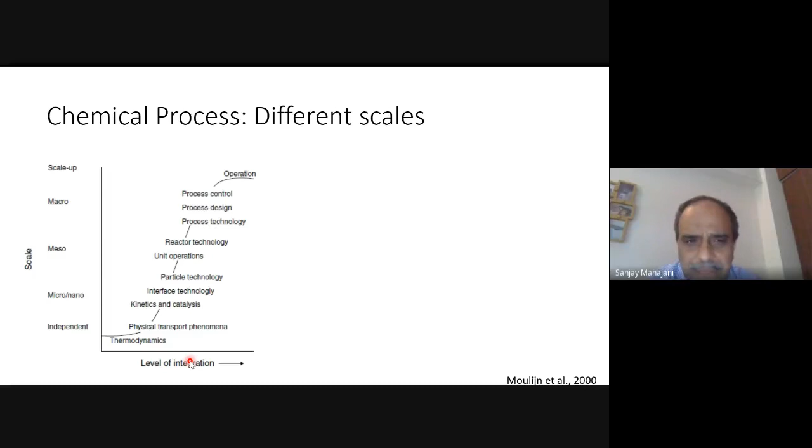So it is scale dependent, and at the same time the integration level goes up. When I say level of integration, what does it mean exactly? The complexity, okay. In simple terms, it is complexity, or probably combination of various steps together. So okay, this is catalysis and kinetics.

Then I'm not going to talk about every subject, but then you can very well understand that we have interface technology, particle technology, unit operations, like distillation, evaporation, crystallization, absorption, stripping, wherein you have even more level of integration, and the scale dependency is happening.

What is the implication of scale dependency? That means suppose I do an experiment in laboratory, and I want to actually take it to a larger scale, say 10 times, 100 times, or 1,000 times. Will it get replicated very well? The scale-up issues, you may face some problems, and that's why you have a scale dependency more in the case of unit operations.

You have to consider mass transfer, how it behaves in different geometry or different scale of operation, what kind of Reynolds number you will get, what kind of Schmidt number you will get, how will be the heat transfer, what is the mode of heat transfer that you need to have. So all these, like unit operations, and even the reactor technology, that means what kind of reactor you will use, whether it will be a multi-tubular reactor, a single fixed bed reactor, or there'll be interstage cooling, heating.

So all these factors need to be considered so that it becomes more and more complex, and of course definitely scale dependent. Now we are going to go to process level. So this was still at the equipment level, this was at particle level or reaction level. Now we are going to the process level. The integration now increases further, and now the scale also increases. Now it is becoming a macro scale, MACRO.

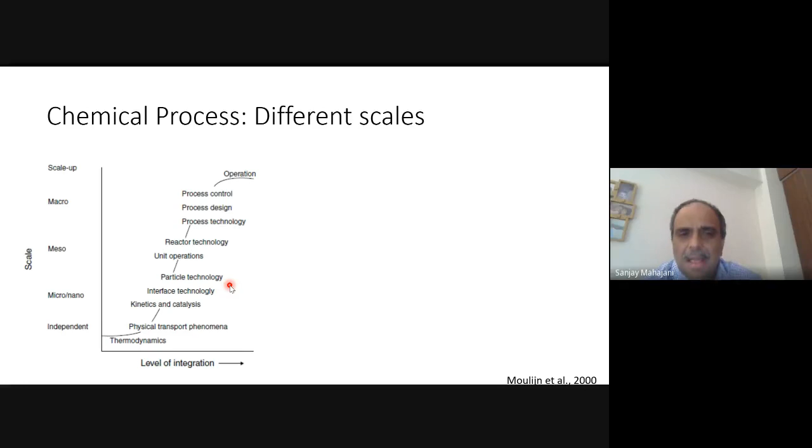Then at a reactor level you have a meso scale where you are talking about particles, reactors, reactor selection, and all that. And then you have a process when the reactor becomes part of the process, where you have many other blocks connecting to each other in the form of a network, which is nothing but process in our language. So that is nothing but a macro level.

So in terms of scale, there are broadly three scales, but I will further fragment them in terms of modeling and simulation. Computational techniques as such, learning it as an independent subject, is more towards mathematics and numerical analysis. But if you look at the context of chemical or biochemical engineering, it's better for engineers to first look at applications and then learn kinetics and computational techniques, because otherwise it is only mathematics, then there's no fun. Mathematicians would love to do it, but engineers will always look at applications, and then only they will be driven towards doing some maths.

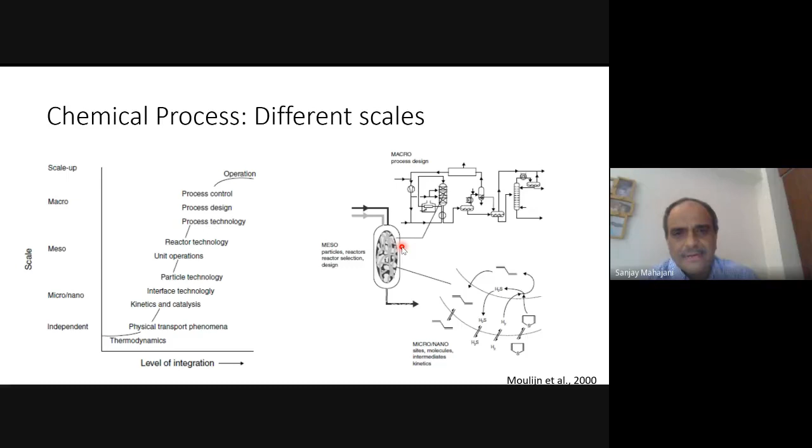So I think by this point it is clear. Let me go back to the chat window and see if there are any questions. No questions so far, that means all of you are with me.

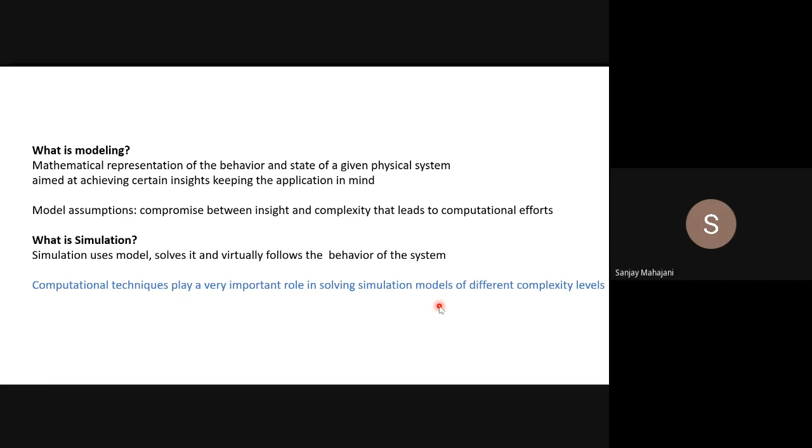It all depends. Scientists who want to understand what's happening on the molecular level will predict the movement of molecules, how bonds are stretched, how bonds vibrate. There the purpose is different - not for commercial use or taking action in an actual plant, but for understanding the science behind it. So you can compromise on speed of calculations and wait for a sufficiently long time to get results. I hope it's clear. I'll move to the next slide.

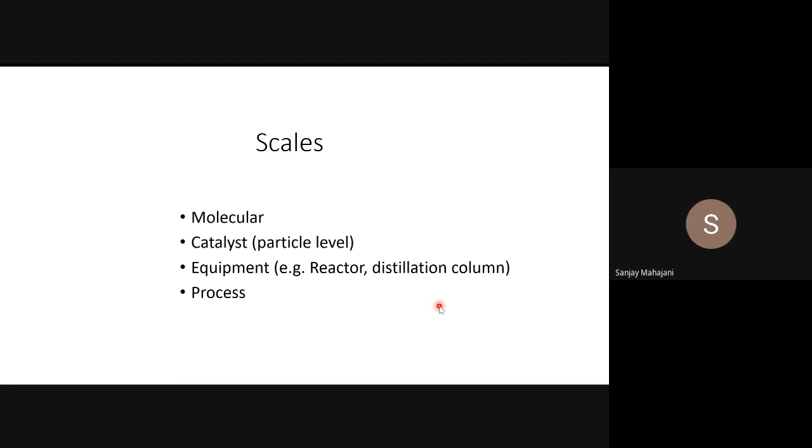Now again, as far as scales are concerned in chemical engineering, we have molecular scale, catalyst or particle level, equipment level, and process level. Imagine a reactor - reaction happening at molecular scale, there can be things changing. At catalyst level we need to predict something, at equipment level we predict something like reactor, distillation column, extractor, pump, compressor. At process level we need to do something, and the scale varies - molecule is of nanometer dimension, then you have processes occupying space of 1 or 2 kilometer radius, like a refinery.

Coming back to reactor design - I'm focusing more on reactor because, as I told you before, that's my research interest. But otherwise also, reactor is the heart of any chemical process, and every chemical engineer is associated with reactor. I think that's a general case study we can always take when we talk about subjects like computational techniques.

So I'm saying reactor design and simulation. I told you I'm going to ask you a question here - what is the difference between design and simulation? Can somebody unmute himself or herself and give this answer?

A design problem and a simulation problem. Sir, design is a specific plan we are preparing for a particular problem. Simulation is working on that particular design, optimizing a problem.

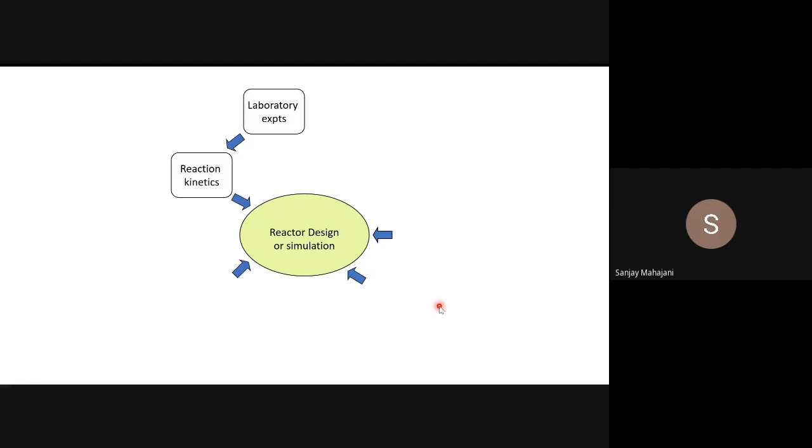So can I determine reaction kinetics by modeling? Can I determine reaction kinetics by first principles, through theory, understanding the reaction mechanism, understanding the reactivity of molecules, understanding what is the activation energy for a reaction, without doing experiments? This is something that is really catching attention these days, mainly because quantum mechanics and density functional theory were there before, and people had made advances in theory much earlier. But what is happening today is we have computational facilities that are quite efficient, high speed computers able to do calculations simultaneously on different chemical computational platforms, and because of this our ability to solve models has gone up.

We always think reaction kinetics means go to the laboratory, do experiments, generate data, and come up with some rate law based on that—what is the order of the reaction, what is the rate constant, what is the activation energy, and so on. But without doing experiments, can I get the same or similar or more complicated expression and explain something? It is possible, but today, as far as theory and overall modeling efforts are concerned, it is a gray area. I won't say people have not done anything, but there is enough scope to actually work on this. For it to come into mainstream will take some time, but there are a lot of things happening.

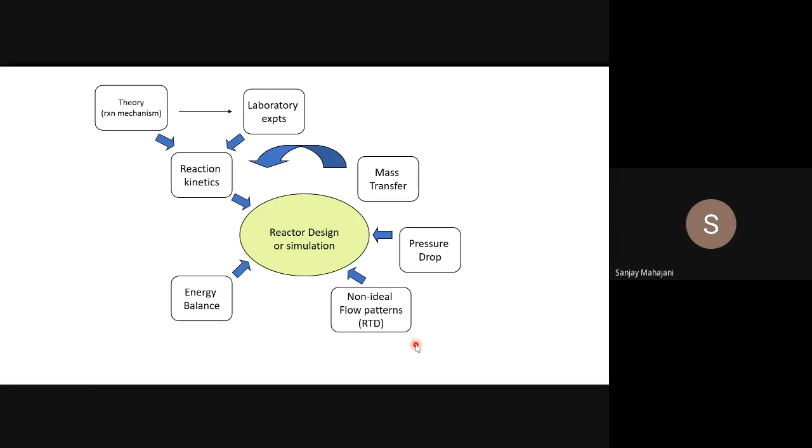Then about pressure drop: most of the times for gas phase, pressure drop also affects reaction performance. If you have a higher pressure drop, the density goes down, the concentration gets affected, the driving force of the reaction gets affected, and the momentum balance has to be written to actually get this right. So you have mass balance, energy balance, and momentum balance to be written together, and you have to have a model for that.

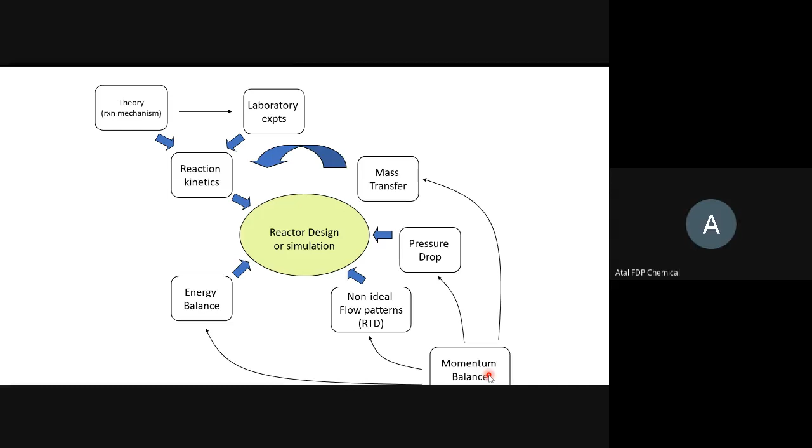Is somebody asking a question? Hello? Let me go back, or let me ask the coordinator if there are questions in the chat box, then I will stop the presentation. Is that fine? Yes, sir, at present there are no questions in the chat box. No, sir. Okay, fine, there is no question. If there is any question, just tell me so I will stop. Okay sir, we will inform you. And if any participant has a question in between, you can always unmute and ask. Okay, not a problem. Non-ideal flow patterns—any question on non-ideal flow patterns?

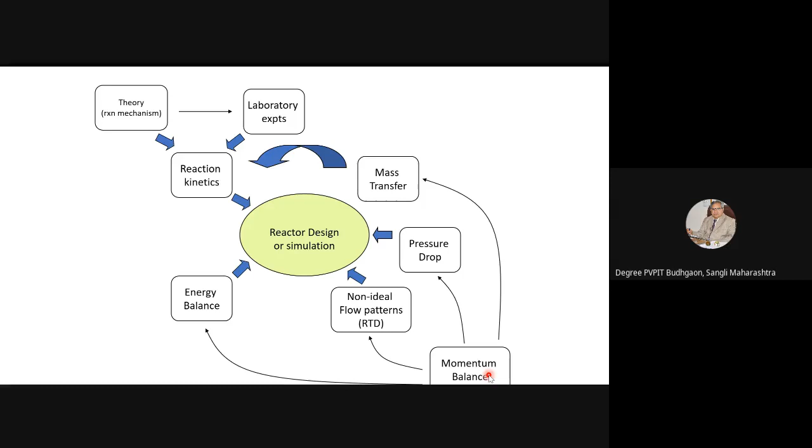How does non-ideal flow pattern and pressure drop contribute to momentum? Oh, okay, actually it's the other way around. The momentum balance would contribute to pressure drop and non-ideal flow patterns.

So I need to write the Navier-Stokes equation in three dimensions to understand the velocity vectors and see whether you have axial mixing, mixing in the radial direction, and so on. Similarly, pressure drop is also included in the Navier-Stokes equation.

I need to write momentum balance to get all this, along with mass transfer and energy balance. The coefficients are a function of Reynolds number, and boundary layer thickness also depends on it. So momentum balance is very crucial, and in fact it is more difficult compared to mass and energy balance because it has three directions of velocity, x, y, z, which makes it more complex.

We tend to make assumptions of a one-dimensional or at most two-dimensional model. We don't go to three-dimensional models in undergraduate curriculum because it becomes too complex to solve, and students won't appreciate it unless they get answers. They first learn something relatively simple, and that's why textbooks normally don't consider momentum balance in reaction engineering courses. So it is decoupled from reaction engineering, but it is very, very important, as I said.

Is that clear? Does the temperature difference contribute to this momentum balance?

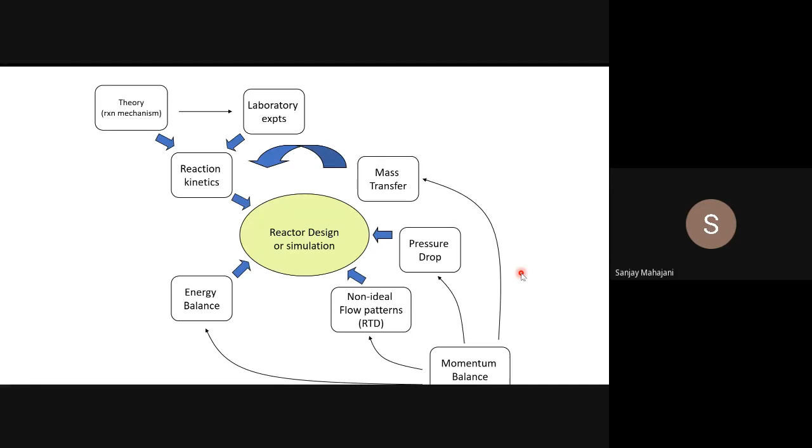So that's where modeling, simulation, design, different computational techniques and algorithms will all feature. Shall I go ahead? Yes, yes, sir.

So this is the complete picture as far as the reactor is concerned. This slide, I don't need to tell you much, it's very basic, like reaction kinetics and so on, but I included this slide just to maintain continuity with what I'm going to tell you later and what I've told you before. So what is this?

I am not going to read this, this is all basic reaction engineering. You can see the Arrhenius plot there, the rate expression there, everything there. You can see activation energy, how it changes with progress of reaction, and this is nothing but activation energy.

Why did I make this slide? Because the next slide is going to tell you how to calculate activation energy. Now, by the way, how do we determine activation energy for a given reaction? Most of the time we determine it by conducting the reaction at different temperatures and plotting the Arrhenius plot, and the slope gives me activation energy, right?

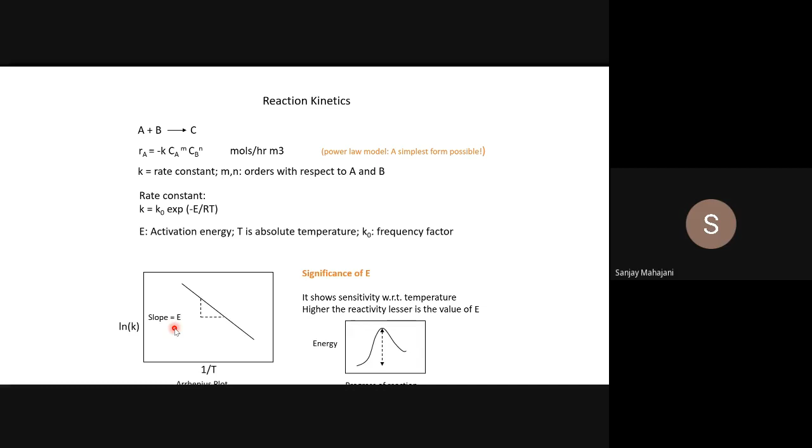So what it means is I need to do experiments. But if I don't want to do experiments, and at the same time want to understand better how to choose a catalyst, which catalyst will work better, I need to do modeling. I need to do modeling at the molecular level, to understand what happens on the catalyst surface.

I need to understand how molecules walk on the catalyst surface, how molecules fight with each other on the catalyst surface, how molecules love each other on the catalyst surface. So in order to know all this, we need to write equations at the molecular level.

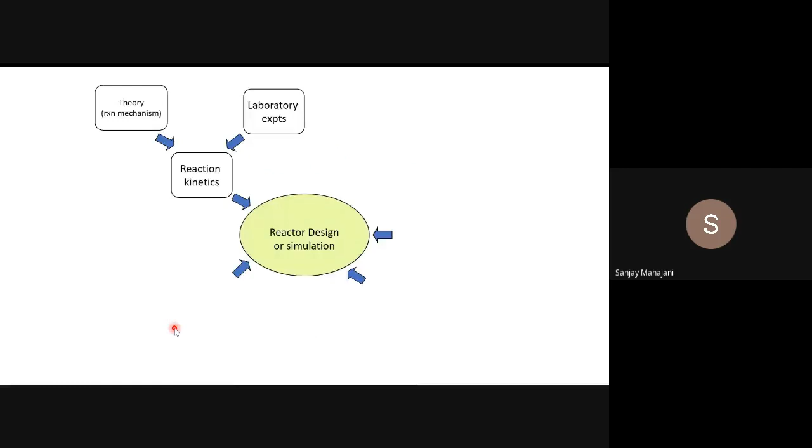Look at this slide again. I'm talking about time and scale. If you go back to my earlier slide, this is the slide. I am somewhere here, talking about small size and small time, at this level.

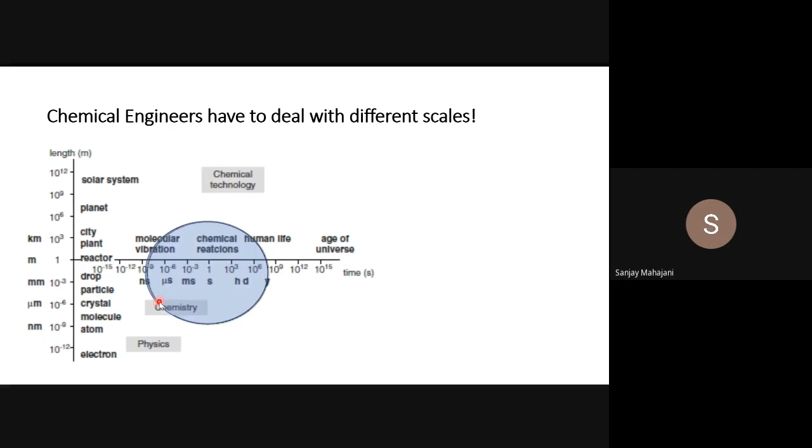So time and scale. Coming back to this slide, there are many efforts that are going on. And what we are conversant with as normal chemical engineers is this, where we are talking about continuum.

That means I don't look at molecules, how they behave, how they move, and all that. I don't see that. Whenever I write a model for a reaction or reactor, I just write it as a continuum space. That means everywhere - suppose if you have a CSTR, at every point you have a molecule present, both the molecules are present, A, B, and of course C. So I really don't distinguish between molecules. That is our continuum model.

But then if I want to understand the intrinsic kinetics better, if I want to calculate the activation energy and so on without doing experiments, I need to go to smaller and smaller scales. This is again a field on its own - it will take another 10 lectures to actually explain what I've given here. This is one figure that puts together almost everything.

So then again you have different scales there, within your molecular level itself, and you can go back and do some calculations depending on what you want, what is your objective. The smallest one talks about femtoseconds and all, where it actually tries to capture the vibrations in the bonds, translational motion, vibrational motion of molecules, then lateral movement and all.

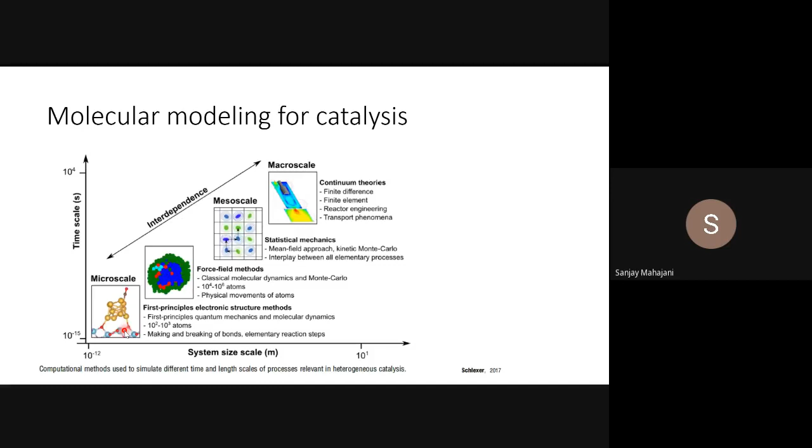But why are we able to do it in such a simple manner? It doesn't look like a complicated set of equations, algebraic or non-linear algebraic or linear algebraic, or differential ODE, PDE and all that. Why? Because we have simplified them. Try to understand the role of assumptions here.

But remember, there again we make assumptions that the reaction is first order and all that. If the reaction becomes second order, or the reaction has two reactants, then defining effectiveness factor becomes difficult. So you have to write equations and actually solve them together. The model becomes more and more complicated. Gas-liquid mass transfer—if you don't have solid, but gas dissolving in liquid—there again you need to write film theory or some penetration theory and come up with equations to solve for rate of reaction. Why are we doing all this? Because we want to get this particular rate in our equations—the exact value, the realistic value of this rate. It may not be intrinsic kinetics; sometimes it may be hampered by mass and heat transfer effects as well.

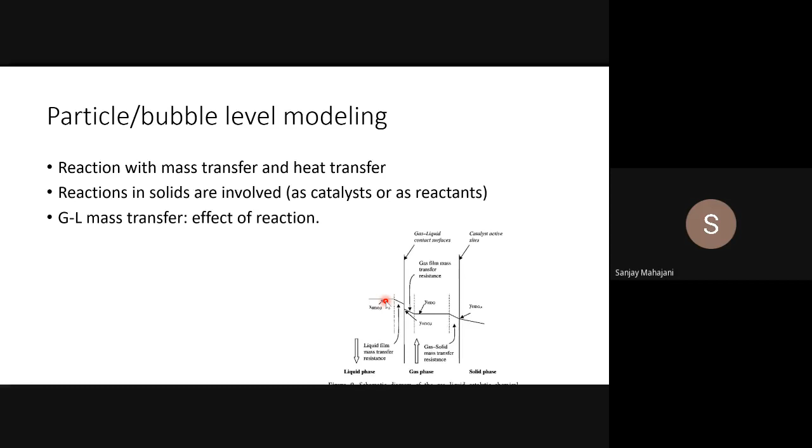Let's move to the next one, where we are talking about mixing related issues. Remember that slide where we talked about mixing and non-ideal flow patterns? They are very important, but they are something that we normally tend to ignore. When some students come to our reaction engineering course—like last year I asked an MTech student—do you know RTD, residence time distribution, the E curve?

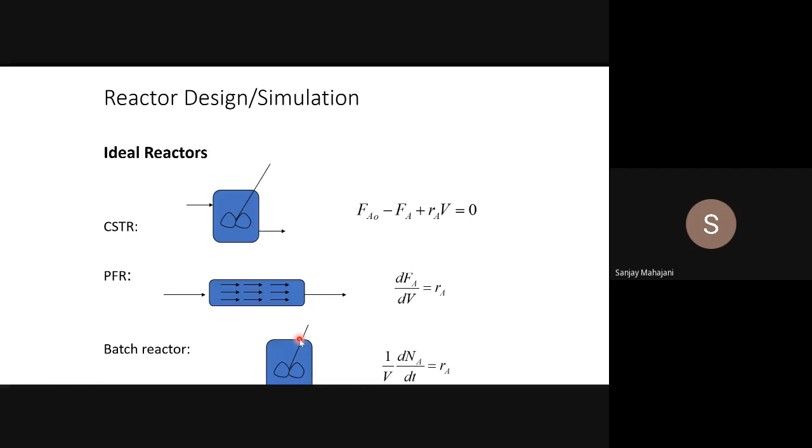Similarly in PFR, I assume that along the radial direction there is no concentration gradient. I am assuming it, but in reality there may be a parabolic profile or some other kind of profile, and we need to consider that, because actual performance will not depend on your assumption. Actual performance will depend on what prevails in reality, right? So that is what I was going to tell. Any questions so far?

Sir, still there is no question in chat box. Okay, very good, there are no questions. Hello, sir, yes yes. Okay, go ahead, yes yes sir.

I would like to know whether in micro mixing, can you determine the gradient, if it is there? So micro mixing at molecular level, if there is a difference there, okay...

With first principle equations, it is slightly difficult to understand the concentration gradient that is happening at a molecular level. So it's a good question. There are efforts going on. So basically, again, we need to go to molecular modeling in the reactor. Earlier, the molecular modeling that I explained was on the catalyst surface, but now we are talking about a reactor in which the molecular level mixing is inefficient. Understanding that, there are papers, there is research work going on, but again we need to take help of molecular modeling along with the macro level modeling.

But then there are indirect ways to deal with this. There are ways to actually incorporate micro mixing effects, and there are some empirical and semi-empirical models available to take care of this mixing effect, which superimpose on actual rate of reaction. So for example, suppose you take wood, burn it, and then pass air over it. The rate at which wood burns, it is not the intrinsic rate of oxidation reaction.

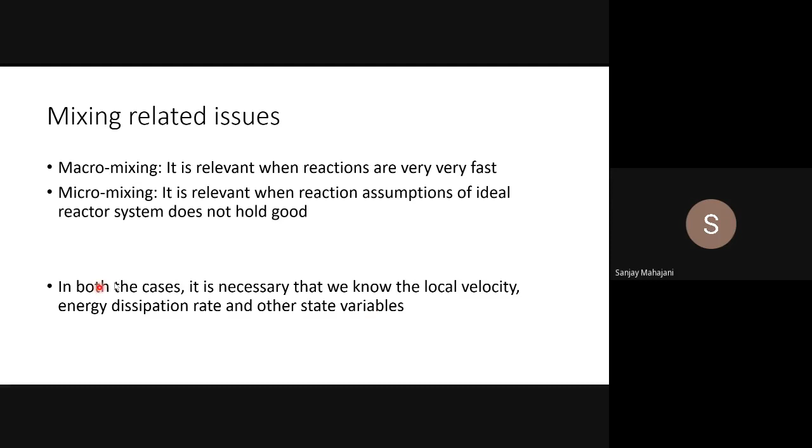So this is the answer to my earlier question, where I need to know the local velocity and local attributes in a reactor. CFD is becoming very important, and now I have a case study here - an example from our own research, and you can imagine. I'll explain the application.

What I'm trying to tell you here is underground coal gasification, UCG. You won't imagine that this is something that can be done with chemical engineering very well, using tools like computational fluid dynamics. This is not a conventional reactor.

What am I doing? There is coal available deep underground at a depth of about 500 meters or so, and I can't mine it - I can't take it out to the surface. So what is being done is you drill an injection well, drill a production well, and connect them horizontally. There are ways to do that - oil companies which produce oil have kind of mastered these techniques. This connection will establish some flow to happen.

Then you pass your gasifying agent, like steam, carbon dioxide, and oxygen, and in the coal seam itself the reaction will take place, and the product will come out in the form of carbon monoxide and hydrogen. That will be taken to gas cleanup and CO2 capture, and then you have electricity generation - the power plant.

We have very large reserves of underground coal, to the tune of 60 billion tons. So if we in India are able to do something effective here, we have so much energy available and will be almost self-sufficient in our energy demands for power generation. Today we also have surface coal available, but it's high ash coal, and the deeper you go, in many places the ash content goes down.

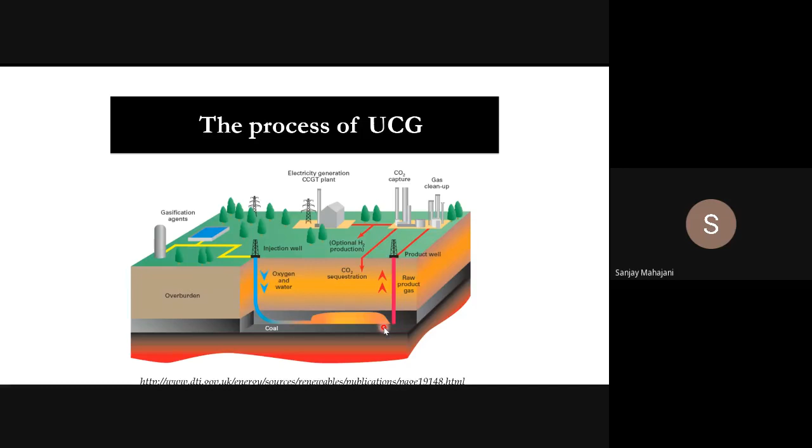which is a combination of CFD and our conventional modeling approach. And we are now able to predict what will happen if somebody gives me the coal sample. I can find out the composition of the gas that comes out, the flow rate of the gas that comes out, how much coal is utilized, how big is the cavity that is generated there. All these predictions are done using this model that we have, and that simulator has been passed on to ONGC.

So this is a typical process. Now I'll just look at a coal seam. Above this you have a non-carbonaceous material and all that. This is a coal seam. You have gas going in and gas coming out at any given time. This is the picture, this is the cavity that is generated.

Now what is going to happen is, because of the high temperature, you have a roof of the cavity. The coal is getting detached from the surface, it is falling down into the cavity. Here you have the ash, because some of the coal is burnt and energy is generated. That energy is used for gasification, and this is the coal which is unreacted and getting reacted because of the gas that is coming out, and carbon monoxide and hydrogen is going to the product well.

Sorry, I'm going a bit fast because that is not important. I'm not here to tell you what underground coal gasification is all about. I'm focusing my attention on how we did modeling of this process. You can imagine, you can't assume this as a CSTR, you can't assume this as a plug flow reactor and so on. So how do we tackle this problem?

This is a great challenge now. So if you want to do process modeling, what data do you need? First of all, reaction kinetics, the same thing that I showed you before - look at it as a reactor. Then reaction kinetics is required, heat and mass transfer is required, flow patterns are required. This is very important, and this is what I'm going to tackle.

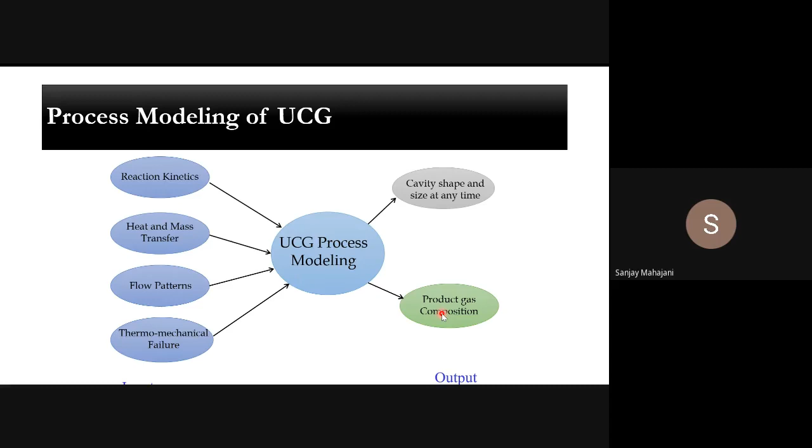Entire modeling: we generate kinetic data in laboratory, we include the mass transfer effect, and we get time versus conversion and come up with the kinetic rate equation. I don't want to spend more time on this - there's an instrument like thermogravimetric analyzer and all that. Just for the sake of completion, I'm including this because kinetics is determined using CO2 or even water, for gasification. Intrinsic kinetics is known - that's the input that's given.

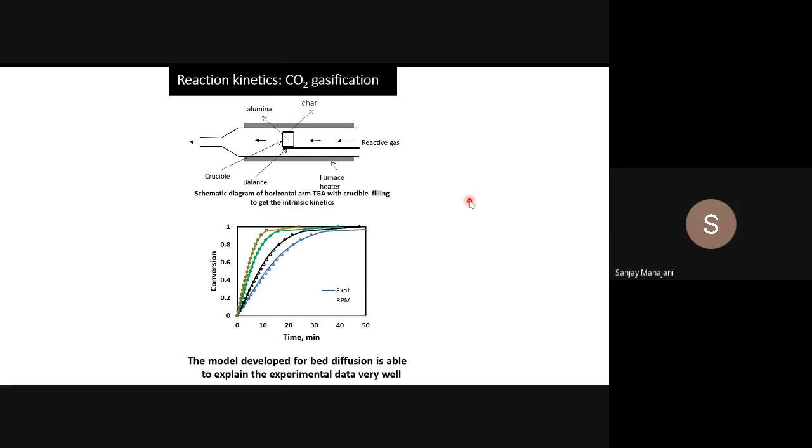And not just velocity, we were able to predict temperature, we were able to predict all these things. But this is with reaction not enabled. If you enable reaction while doing simulation, your computational time will go up like anything.

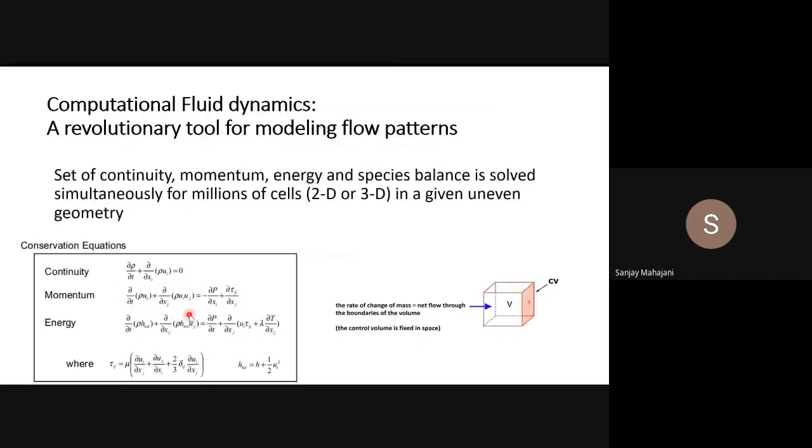How did we arrive at this equation? How did we arrive at this particular velocity profile? By solving these equations, with modifications in terms of geometry, giving the right boundary conditions and so on. The set of PDEs, algebraic equations, differential equations, coupled equations solved together. How much time does it take? Enormous. Of course, this was done in 2010.

The student had to wait for a couple of days, 3 days, 4 days to get the answer, and at the end of 3-4 days he's desperately waiting for the answer and realizes he had made some mistake in giving the input. You can imagine how depressed he will be. He just lost 3 days, right? So this is a problem, but today we are able to do this in almost less than a day.

That's how the computational speed has gone up. The software has also become quite efficient now. They have more robust and fast algorithms which are able to do these calculations very, very well.

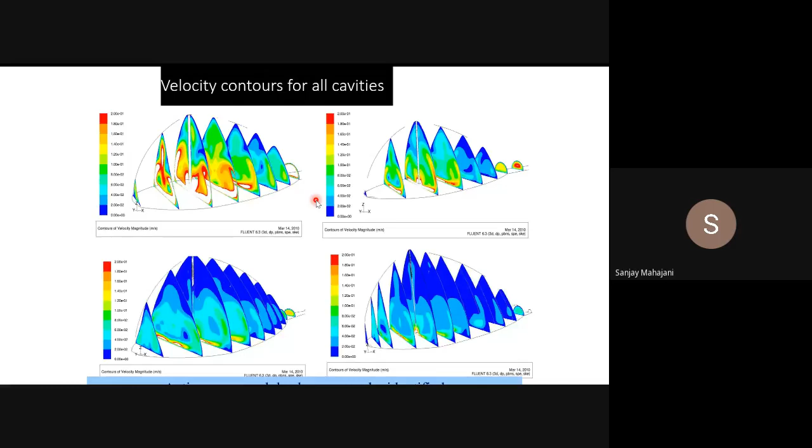So now why have we done this? Because we want to understand what's happening inside. I can't treat it like a CSTR, I can't treat it like a plug flow reactor. Now how do I predict the conversion? How do I predict the concentration of the product in the gas that is coming out based on this?

So that's why we came up with an exercise which is very important, and this is something one should understand: how to actually come up with a model which is simple in nature, based on the flow patterns that I have generated using a complex computational technique like CFD.

So after getting this flow pattern, what we did was, if you enable reaction in this and try to come up with a first principle CFD model, then you will take a hell amount of time. It will take more than a week or even sometimes a couple of weeks to get the answer.

Just to simplify that, what we did is look at this compartment model approach. What does it mean? It means I look at this velocity profile, and by looking at it, I imagine this entire geometry as a network of basic cells like PFR and CSTR.

Now there is a technique to actually come up with the right network of these cells, or network of these ideal reactors, which will represent the behavior like what we get here. Now so what is common between this network and this?

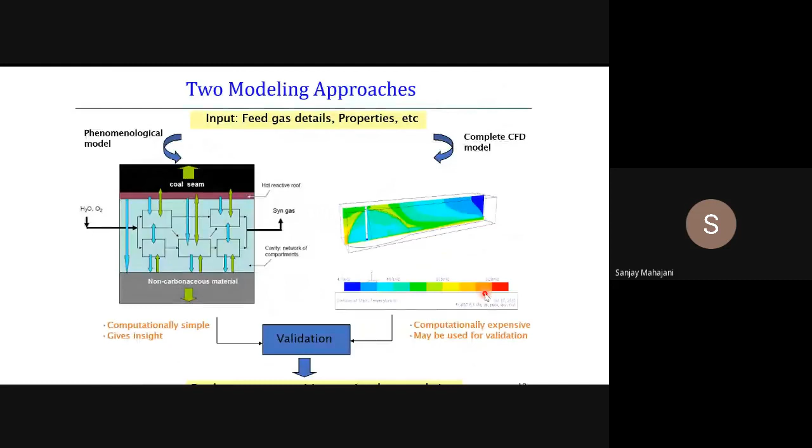So what I'm trying to tell you here is that such a complex problem can be tackled very well using computational techniques, but with some creativity in terms of this compartment model to reduce the computational efforts. We have machines, we have algorithms, but they themselves have limitations.

How many cells did we make here? The entire geometry, this is 1 meter cube geometry. It's not very small, not very large also. But within 1 meter cube, we had more than a million cells for which the calculation was performed. And with that, we got all these contours of velocity field.

And then we captured that velocity field in a simplified model that can be solved using MATLAB or something, and we are able to get this behavior which is reasonably good. And this is the value of calorific value that is generally obtained experimentally also. Whatever field trials were done in the past, they got a similar value of about 150 to 160 kilojoules per mole. That's the calorific value. And we are able to predict it very well.

And overall, I think we were able to capture almost all the effects. So that is the potential of modeling, simulation, and computational techniques that we have. And it is changing very fast. Don't worry about computational speed today, because after 5 years you're going to get a double or even more than that computational speed. At the time we did these simulations, we were worried so much about the speed of the computer, but today I think the same program runs in almost half the time.

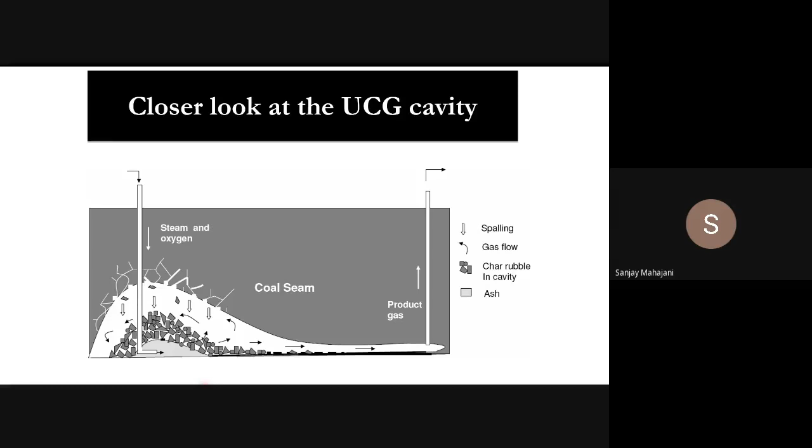There is this channel here, tubular flow happening - there may be some PFR there, and there is a small PFR in this portion as well, because when circulation happens, this particular stream goes like this. Though this arrow is shown here, if you go close to the wall, there is another PFR. So you'll have many CSTRs and PFRs combined with each other, and you get this behavior.

So just to give a short answer to your question, how do we arrive at this? Of course we need to do a lot of trial and error, and it's not just blind trial and error - it is based on the flow visualization that we have from CFD. Is that fine? I hope I have answered your question.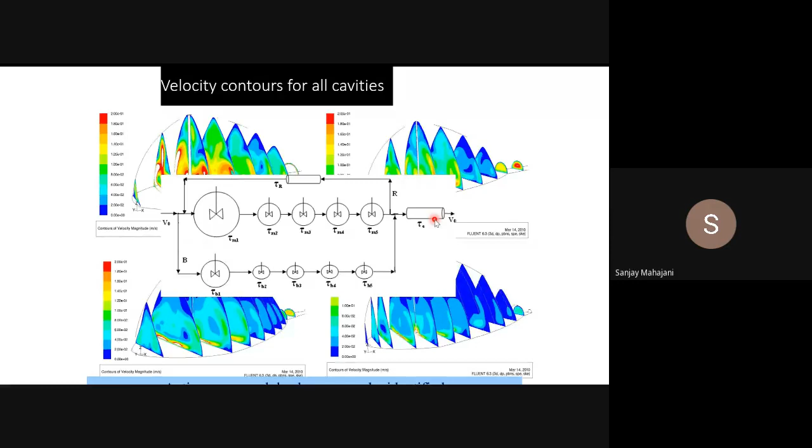Yes, sir. Thank you. Okay, thanks. Any other question?

Yes, sir. So, as we have discussed related to the pilot plant, how will modeling and simulation be helpful in cost reduction when we are doing construction of any plant on the major level?

You mean the commercial plant, right? Yeah. Actually, okay.

Actual level modeling simulation, as we've seen before - let me try, instead of answering short, to tell you how this entire process development is done, and what are the different activities before we go from laboratory to the plant scale.

So what happens is you actually do some experiments in lab and come up with a process know-how. You have a small apparatus in which you conceptually prove that the reaction is working well, catalyst is working well, these are the conditions for downstream processing, I get so much yield and all that. So that is laboratory know-how, which is documented, and now that is given for engineering.

So the next step is people say, fine, yeah, this is good, and before we actually proceed, engineers will look at all the information and data given, come up with some kinetic models, and try to simulate the performance of the process.

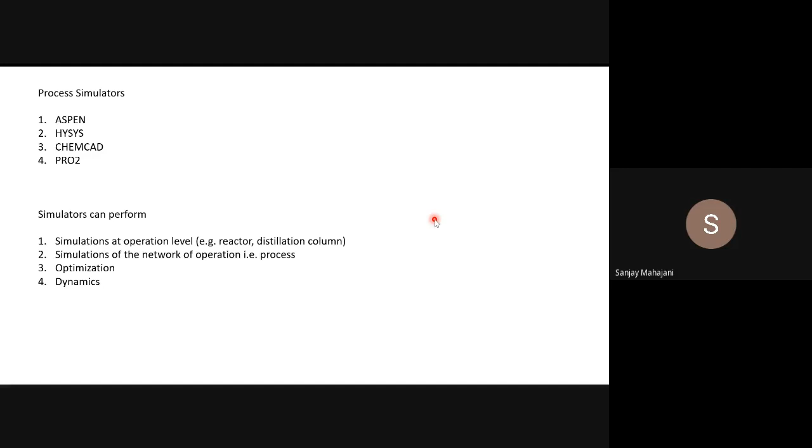Right, so at equipment level, what can it do? Just an example of a distillation column - I want to do simulation, not design. Design is something you have done, like the McCabe method or Ponchon-Savarit method and so on. That is a design method, relatively simple in terms of calculation - I can do manual calculation on paper. But when it's a multi-component distillation, it becomes even more difficult. Earlier, when we were students, we didn't have simulators - that was 1985, 98, and all that. Now the simulators have come.

If you have not incorporated simulators in your curriculum, you should do that. It's high time every student should know what simulators are because they're used day in day out in industry, and that is one of the things industry would look at while selecting candidates. So it's very important that every chemical engineering college and department should have simulator exposure for students.

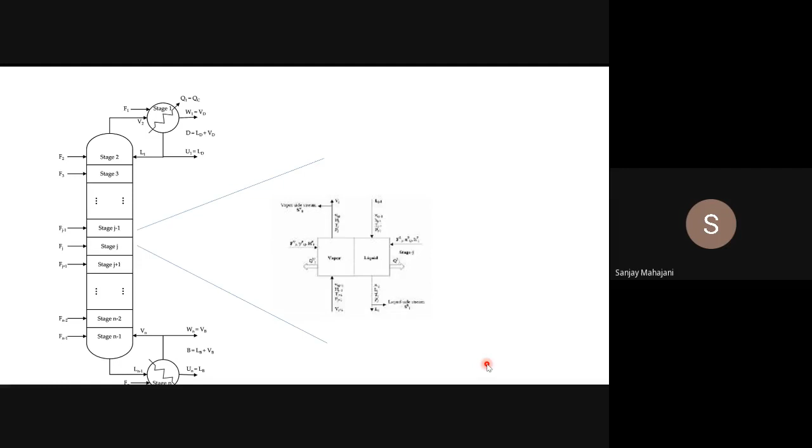So at a particular stage, okay, sorry this is a very vague picture, but basically at every stage I have streams coming in and going out, and I have different state variables. I'm sure you're not able to read it - X, Y, temperature, pressure, and so on. It's okay if you can't read it, just try to capture the essence.

So basically what I'm doing is, for this one stage I am writing so many variables. I'll write mass balance, equilibrium equation, energy balance, and if there is some source or sink term, that will also have equations associated with it. Then you will have summation equations for mole fractions. This is called the MESH equations, and they are written for every stage.

For all the stages, suppose you have n stages, you'll have 10-15 equations for one stage. So for 50 stages, 50 into 10, that's 500 equations to be solved simultaneously along with condenser and reboiler together, coupled. It is not a stage-by-stage calculation like what we do in a design problem - now we have to solve this simultaneously and simulate a distillation column.

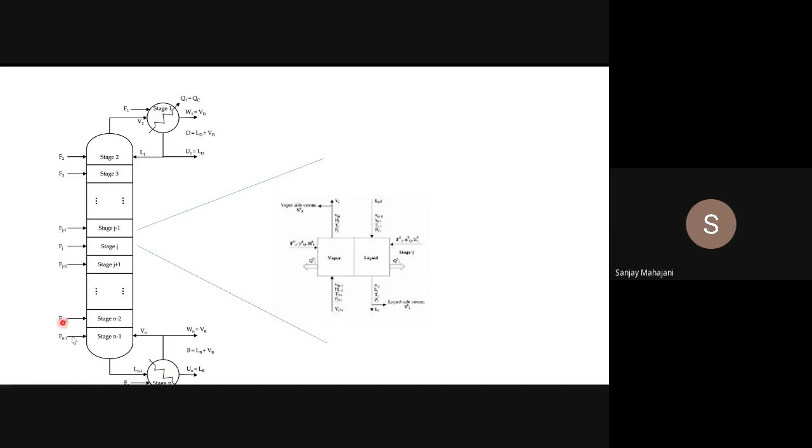So coming back to my earlier diagram, when I say equipment level, I'm talking about this distillation column here - equipment level modeling that I'm doing. Now again, there are many models available for a distillation column. You may have an equilibrium model or a non-equilibrium model, depending on what assumptions I take.

Equilibrium model means the streams leaving a stage are in phase equilibrium - that means I'm providing sufficient residence time and there is no efficiency like Murphree efficiency associated with the plate. And the mesh equations: M is for material, E for equilibrium, S for summation, H for energy. These are the equations along with other supporting equations we need to write and solve together, and all non-idealities can be considered in the equilibrium model.

So this is a very general model, and once we take help of some robust simulator or computational solver, we can relax many assumptions - that's the beauty of a simulator, right? Solving 500-600 equations together is not a big deal, so for those who have operated it, it doesn't really take much time compared to CFD.

Those who have done both CFD and Aspen must have realized CFD takes time because there you're making millions of cells, and every cell is being calculated. Here you have 500 cells for which you are doing calculations. Of course the equations are non-linear, and you may face some problems, which I'll come to soon.

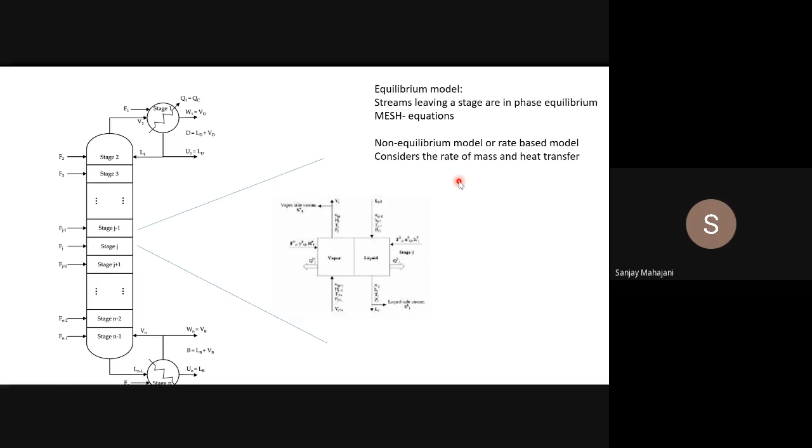Now I'm just making it more complicated. For example, if there's a reaction taking place in a distillation column, it's called reactive distillation - something I worked on for quite some time in the past. Just to give an example, A plus B giving C plus D is a reversible reaction. Le Chatelier's principle says that if you remove one of the products during the course of the reaction, the reaction will shift in the forward direction. So you have the law of mass action explaining all this - I think this is 12th standard physical chemistry, right?

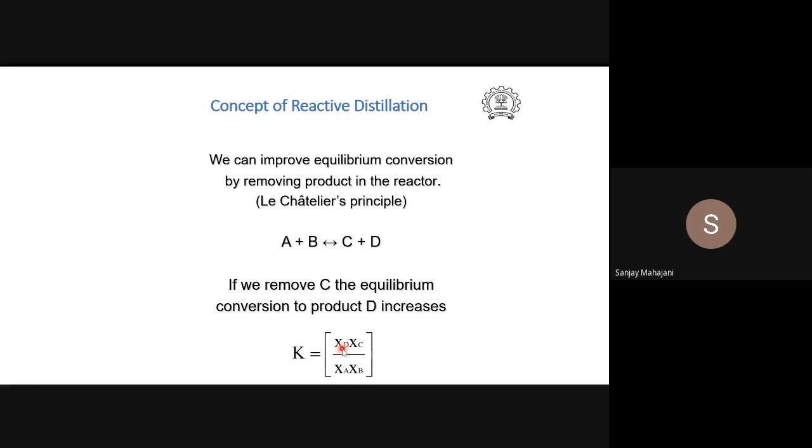The Le-Chatelier's principle - I'm not applying it, I'm doing engineering of that in reactive distillation. So this is what it is.

You have a reactor, A plus B going in. You attach a distillation column to the reactor. You remove C in pure form. Let's assume C is more volatile - at least the volatilities are right. Right means C is more volatile, and D is the least volatile.

I attach another column. So what is happening? You have these three pieces of equipment together, giving you the product C and D from A and B. You don't need anything else in the plant.

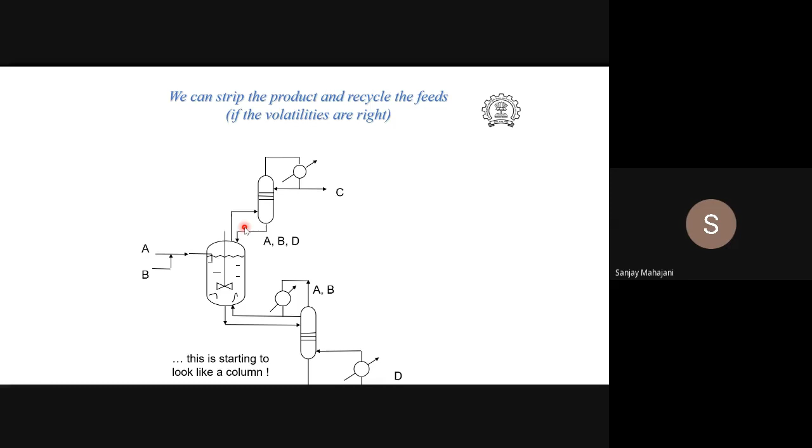In fact, we can combine these three units in a single unit, which is called a reactive distillation unit. If I give a feed of A and B to the reactive distillation unit, and put the catalyst where the reaction is taking place, I get C in pure form and D in pure form. So you don't need anything else in the plant, just one column.

And that is actually done. The methyl acetate process by Eastman Kodak, MTBE process by UOP - all these are using reactive distillation on a large scale, giving so much saving in energy, so much saving in capital, and so on.

That's the advantage, again from an application point of view. Coming back to the theme of this workshop - computational techniques, modeling, and simulation - now that we are combining reaction and distillation together, you have more complexity coming in.

Your equations that we wrote earlier will slightly change. You will have a source term of reaction, and reaction is always non-linear in nature - for example R equals CA square into CB, something like that. A square term or a CA and CB multiplication comes in, so it becomes non-linear. Whenever non-linearity comes in, you have complications, and I am going to talk about one of those complications in a couple of slides.

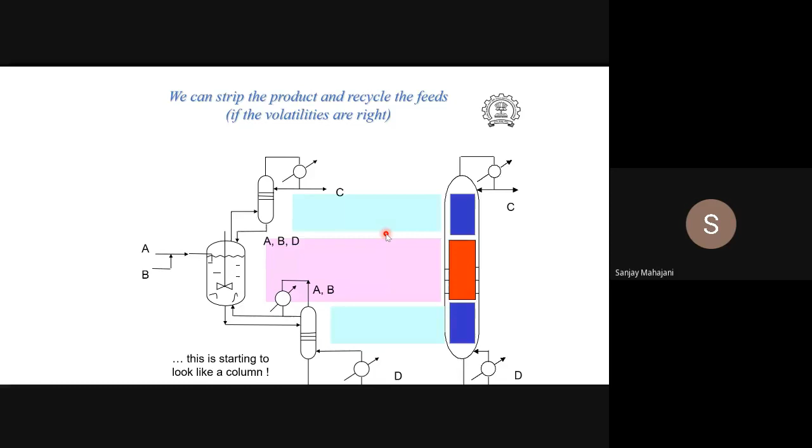And solving all those equations simultaneously - M, E, S, H, and of course the reaction. What are they? They are algebraic equations, non-linear algebraic equations.

Typically, a Newton's method can be useful from numerical analysis, but then again you have to use Newton's method cleverly, such that you have an algorithm to get results very fast and ensure convergence. The problem is convergence - whenever you have non-linearity, convergence is an issue because it depends on the guess most of the time.

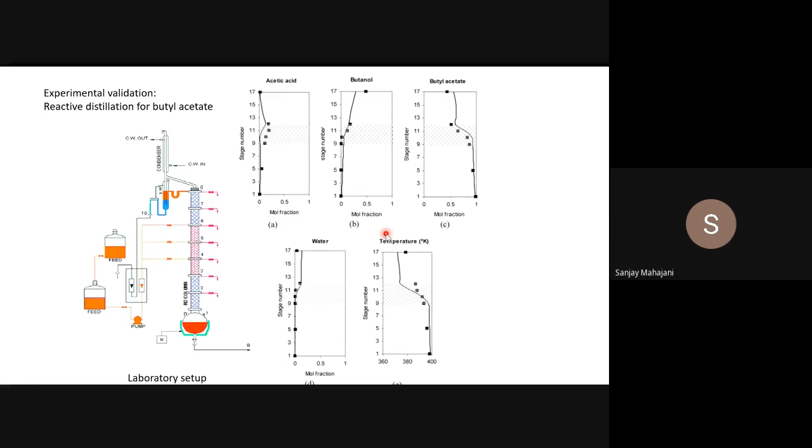If your guess is not right, then what will happen? You will not get a solution. Probably it will diverge or oscillate around the solution.

But in this case, we are using simulators which are actually robust in terms of their computation and in ensuring convergence. So it is quite rare that the simulator comes out saying convergence is not obtained, unless the input given to it is not correct.

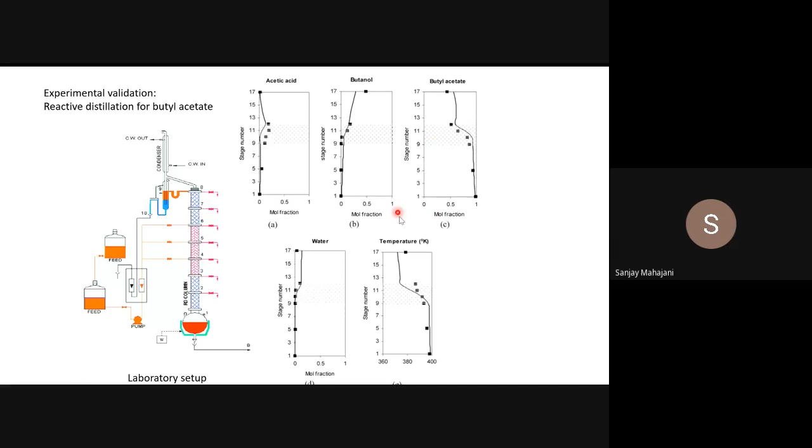That means sometimes you make mistakes in giving the inputs, and then the simulator can't really do wonders. For example, if A and B are going in and I forget to give B, how can the product form? It's not a fault of the simulator, it's a fault of the person operating it - garbage in, garbage out. So you need to know how the simulators operate, what equations are solved, and all that. It looks quite good on paper, but we had to do a lot of study understanding how the simulator works.

It means that because of the non-linearity in the equations, where is the non-linearity coming in? Y equals mx plus c is a linear equation if you consider y as output and x as input. But if we say y equals mx square plus c, it is a non-linear equation.

Suppose you have two variables: y1 equals mx1 square plus n x2, and y2 equals again some function of x1 and x2. These are non-linear, somewhere a square is appearing.

Sometimes it may appear in the form of multiplication of x1 and x2, or division of x1 and x2, or it may appear in the form of e raised to x.

So all this is non-linearity, right? And where does the non-linearity come in our model? Enthalpy is a non-linear function of mole fraction. Reaction rate is a non-linear function of mole fraction. Vapor liquid equilibrium is also non-linear.

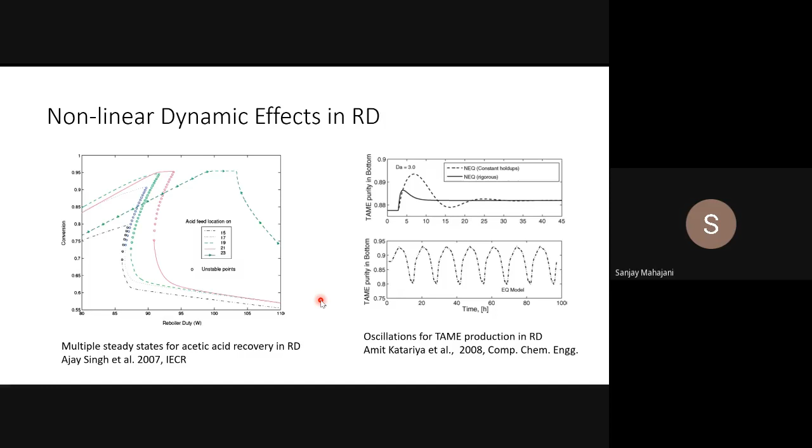Yes sir, yeah. Okay, so now, sorry. Shall we go ahead? Thank you, sir. Thank you, yes sir, yeah.

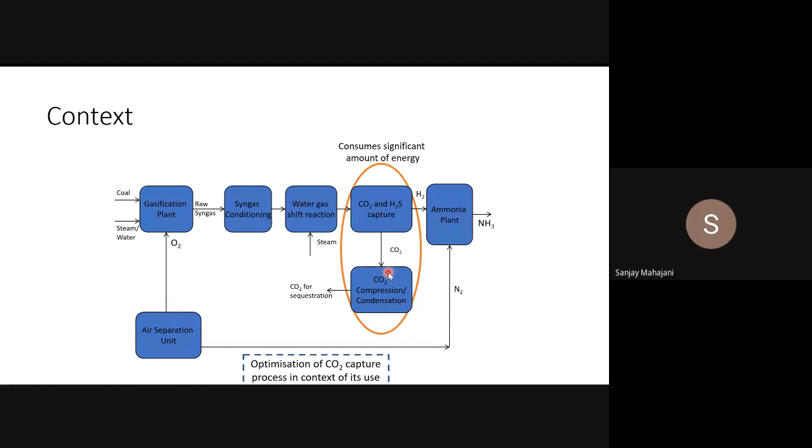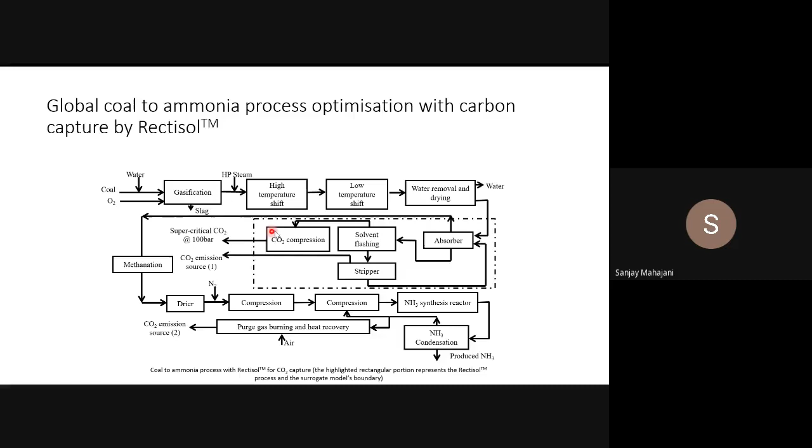What I'm going to give you is the example of this part where I am capturing CO2 in absorption, elaborated here. You are capturing in an absorber, methanol is used, a Rectisol process. I don't know whether you heard about it. Under cryogenic conditions, methanol is used to absorb CO2, then solvent flashing, CO2 compression, and 100 bar CO2 is separated. This is the entire process; this dotted part is the one we are actually concentrating on.

Typically for optimization, you have to minimize or maximize the function f(x,y), where x and y are decision variables, with given constraints on x and y. This is the optimization problem. In most cases, f is the cost which is to be minimized. Example: you have, say, reflux ratio in a distillation column, and in order to minimize cost you have an optimum reflux ratio, normally 1.2 to 1.5 times the minimum reflux ratio. For those not exposed to optimization, I thought I'd cover some basics here.

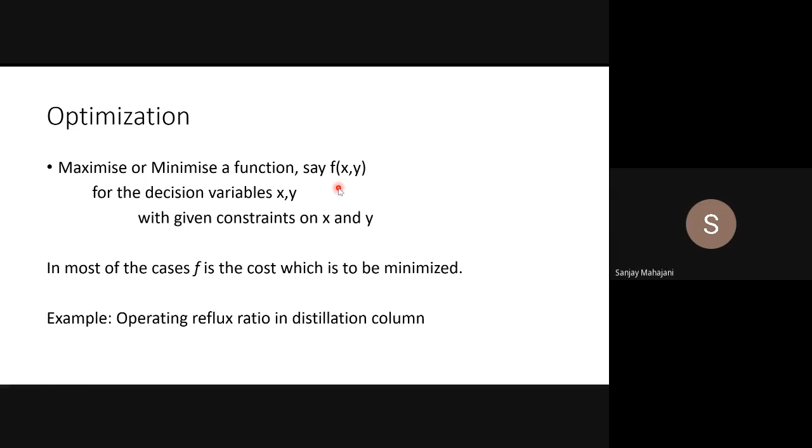Now coming back to your ammonia process, you have two objective functions, F1 and F2. F1 is minimization of cost, and F2 is minimization of CO2 release to the environment, that is carbon dioxide capture. So that is what we are trying to do.

It's a logic, right? I am capturing CO2. If I'm not letting it go to atmosphere, that means I have to put in more money, right? And that is what it is.

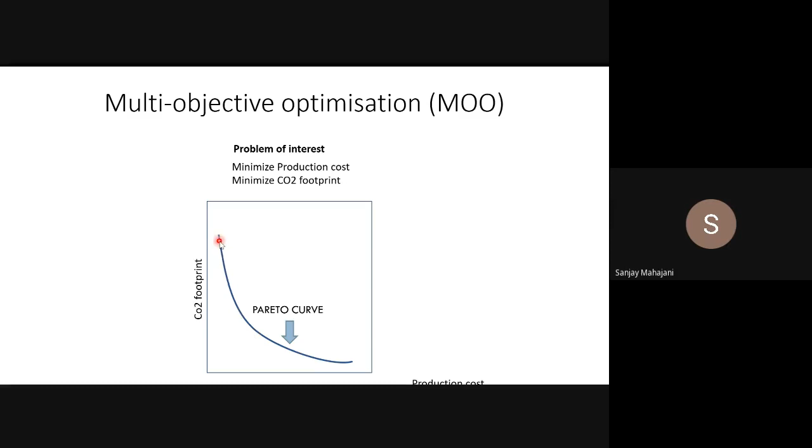So this is a Pareto curve, okay, and we have to actually travel on this curve. The final objective is to get this curve, and that is what we obtain. So this is the problem definition.

The two objective functions are the production cost of ammonia and the carbon footprint. One has to be minimized, and carbon footprint also has to be minimized, but they are conflicting each other.

What are the decision variables in the plant? We have identified these: oxygen flow rate to the gasifier, steam to the high temperature shift reactor, the first stage flash pressure, fourth stage flash pressure for carbon dioxide absorption, chill methanol to the absorber, temperature change. These are the state or decision variables, like X, Y I mentioned. There were 2 there; now we have 3 plus 3 plus 2, that is 8 variables here.

And what is the constraint? The constraint is that your amount of NH3 produced should be 1,250 kilomoles per hour. That production capacity is given to you, so that is a constraint on your optimization problem.

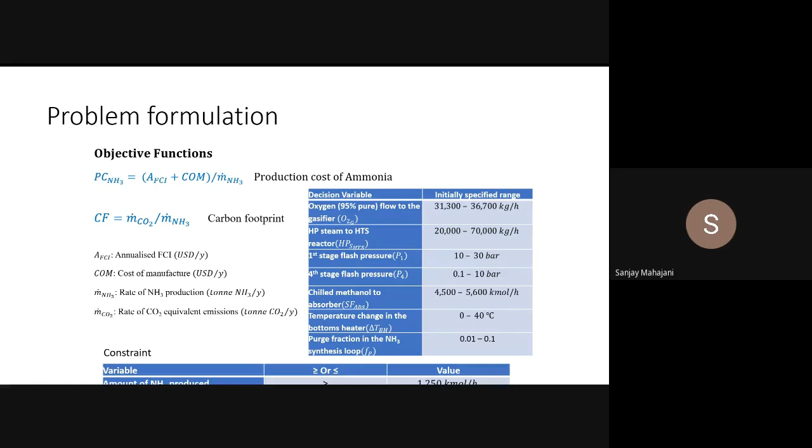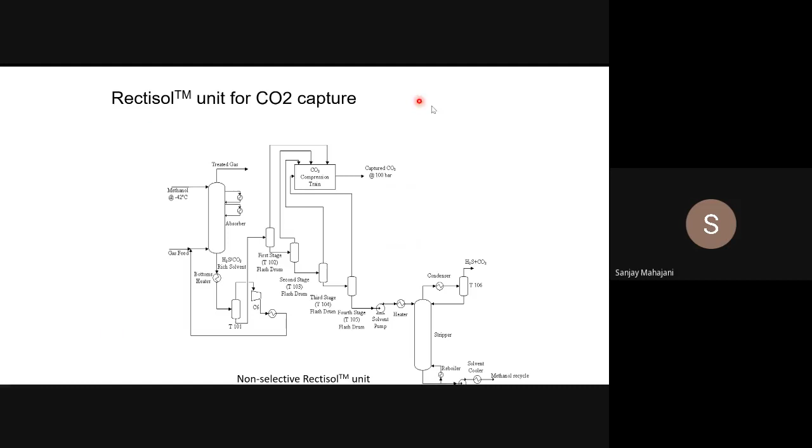Let's not try to understand too much about it. What I'm trying to tell you is how we solve this problem. The possible solution is this: detailed modeling can be done, but there are many variables, and now you need to do optimization. The simulation itself becomes a constraint for you, since you have to keep changing these decision variable values to minimize cost and carbon footprint. So what we have come up with is a surrogate model.

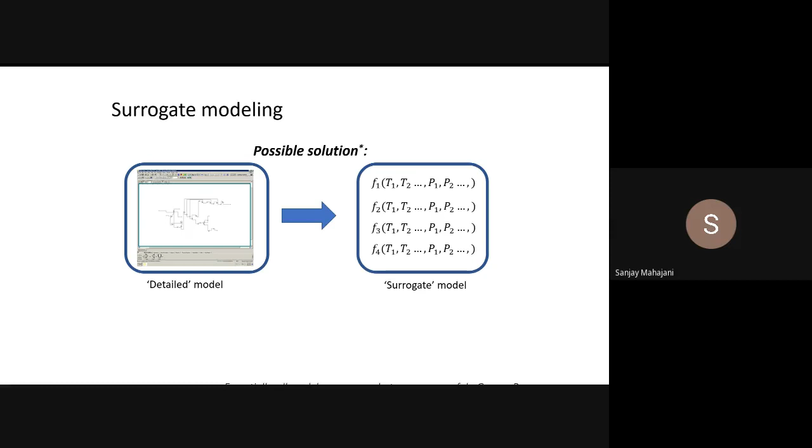So a simplified model: every time I do my iterations, I don't need to actually solve this simulator. Based on simulations done independently, we came up with a surrogate model. In simple terms, it's a correlation, like you have come across the Sieder-Tate correlation, Dittus-Boelter correlations. What do you do? You do experiments and feed that data into some form of correlation. Instead of experiments, we have done simulations independently in Aspen and come up with a correlation.

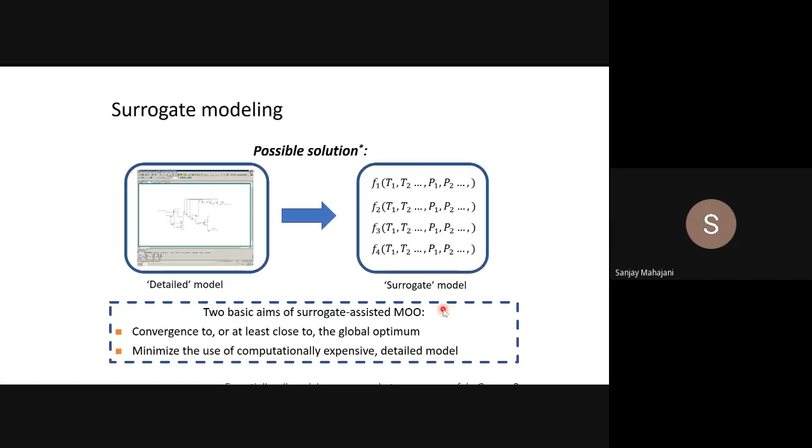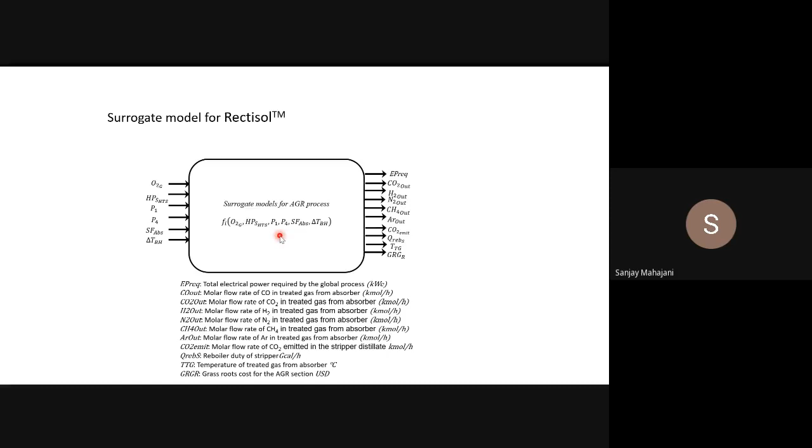So these are all correlations for each independent output that we have, and in brackets are the decision variables. This way my computational load goes down drastically. So we have used this technique of a surrogate model for the Rectisol process. These are the inputs and these are the outputs, and every output is expressed in terms of input in the form of a correlation like this. That's why our computational efforts have gone down, and we are able to get the same effect as we would otherwise get from the detailed model.

With that we've used NSGA, that is Non-dominated Sorting Genetic Algorithm, to do this optimization. So what we do: on the Excel platform we have the objective function defined, decision variables defined, constraints defined, and other NSGA-II parameters, meaning how many values of decision variables need to be checked, all specified here.

So decision variables come out, you do Aspen simulation with the help of the surrogate model built into Aspen. There's a separate refrigeration unit that we optimize separately, and then the objective function values go to Excel, and these are given to another optimizer based on genetic algorithm. Genetic algorithm is something I wanted to spend more time on, but we don't have much time. In a decision variable space, you come up with random values of decision variables, and based on the objective function values, you change those values such that it evolves, through a separate strategy. So it genetically evolves based on the results you got.

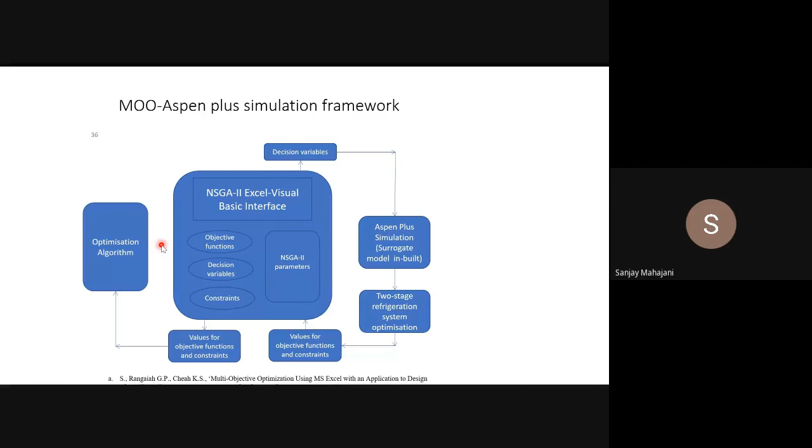Suppose I'm generating 50 values for decision variables. They get modified based on this algorithm, which takes the help of objective functions and constraints, and generates new decision variables. This goes on happening, and finally you get a Pareto curve like this.

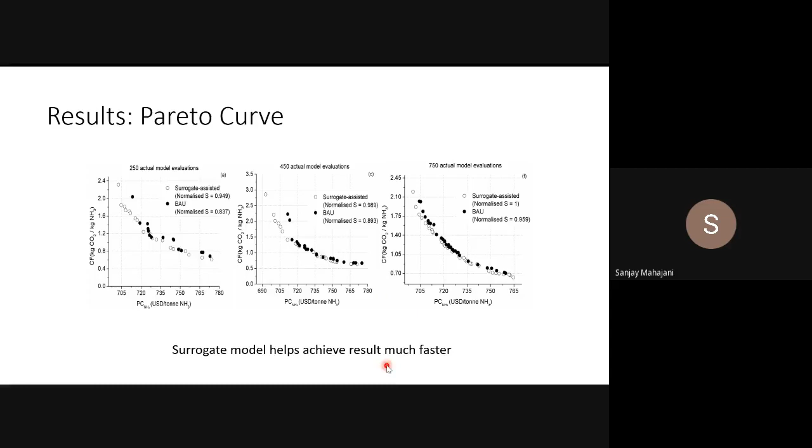Sorry, I went very fast here. What you should take home from the last part of this presentation is that optimization is possible at the flow sheet level with genetic algorithms and such, which are available in open source—we don't need to buy these softwares—but it is computationally a very expensive exercise, like something we do at the molecular level. But there are possibilities to simplify it using a surrogate model.

A surrogate model is like a correlation, and instead of experimental data, we are using first principle simulation data to come up with a surrogate model. Even if that much you have captured, I think that's good enough. If you want to know more about it, I can pass on some literature for further reading.